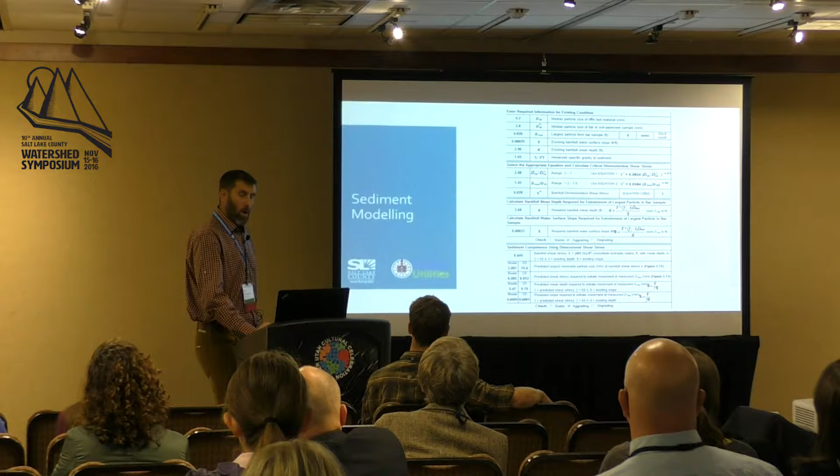And the reason why we do 3 different models, we're looking for convergent lines of evidence, because sediment modeling historically has not really been the most reliable predictor of what's happening with rivers. We do tend to use some of the better models. I use FlowSed, PowerSed. We also use critical shear. We use, I guess, the hydraulic analysis. But we come to a number of different conclusions, and in this case, they all pointed to the same thing.

So another case study of where we've seen something like this happen, Salt Lake County, I'm not going to pick on anybody else's projects, just our own. We have a stretch of stream on Rose Creek at approximately 0.21 miles above the confluence with the Jordan River. And at one point, we had what's called an E-type stream. An E-type stream is a really narrow stream that's got kind of a low width-to-depth ratio. So the width of the stream compared to the depth of the stream at bank full flow gives you a low number. So in this case, the width-to-depth ratio was 3.82.

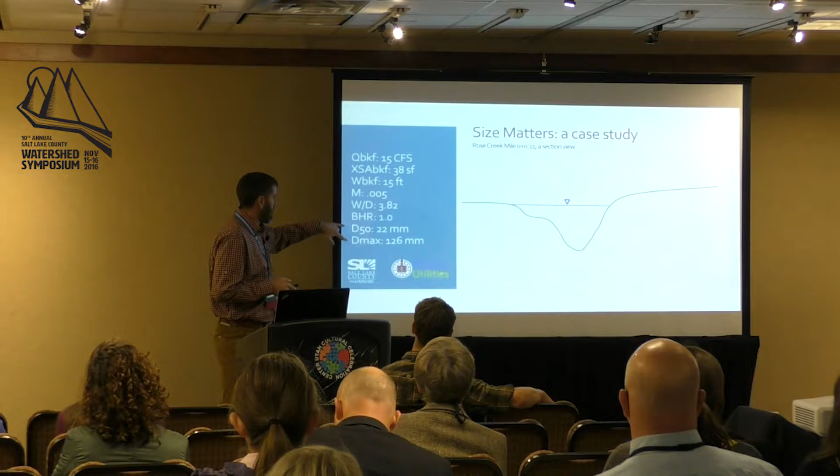The slope of this section was 0.005, so it's a very flat section. Width of bank full was 15 feet, cross-sectional area 38 feet. And then down here, the sediment that was found in this, 22 millimeters, and a maximum sediment particle of 126 millimeters. And then we put in a box culvert so we could put in a gauge there. When we put in the box culvert, we decided we were going to oversize the channel so we'd have plenty of room to move the water through. When you add plenty of room to move the water through, you change the river's ability to function.

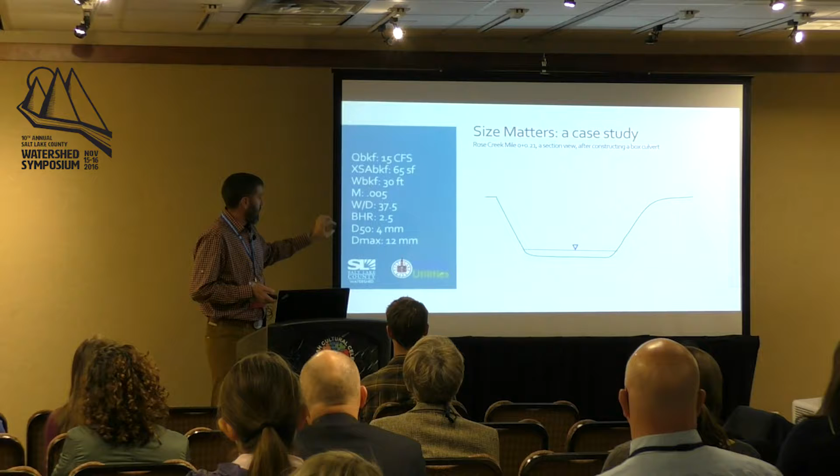This is the new cross-section of that river. And as you see over here, the numbers that can't change didn't, but everything that could change did. So the slope, that didn't change. Width of the bank full, we did change that. Cross-sectional area, we did change that. Width to depth ratio, that ended up changing. And then we incised the channel. And then if we look down here at the sediment, that changed by an order of magnitude. So the river's ability to move sediment through this section, exactly the same location, massively changed. And it's only a 20-foot long section.

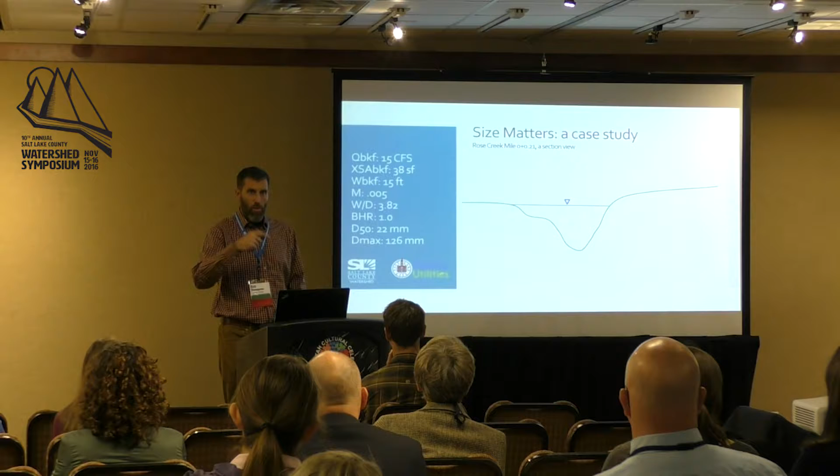And what's really interesting about that, after this channel right here was built, the river rebuilt this one on top of it. So with the first storm, the river deposited 2 feet of sediment, and then almost this exact geometry was rebuilt. So what that tells us is the river knows what it wants, and it's going to tell us every time.

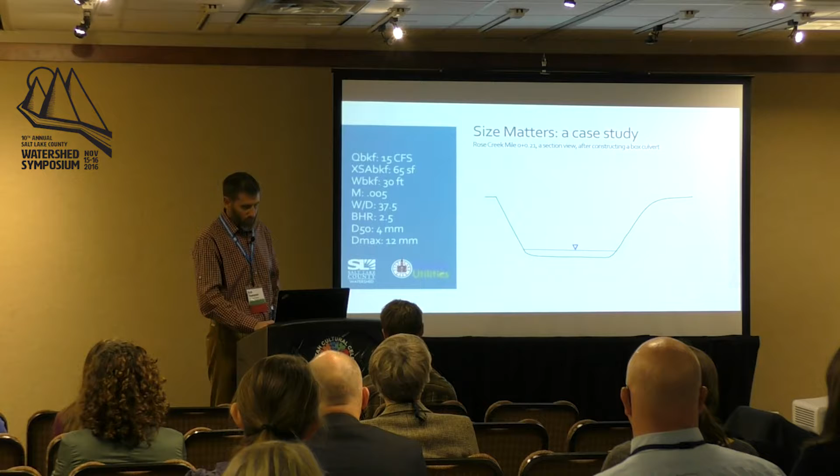So this has been documented by people for a long, long time. This is not a new observation, and if we follow the rules that have been kind of figured out in the past, we could learn a lot.

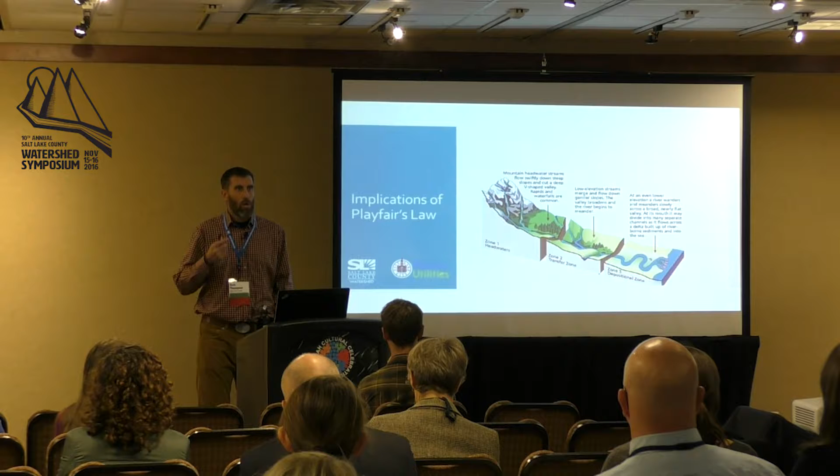So the implications of this, there are certain streams that belong in certain places and other streams that don't belong there. So if we tried to build one of these threshold channels with massive particles down here, it's not the best fit. Try to build a sinuous stream that exists down here, up here, again, not the best fit. So natural channel design, we're trying to put the right stream in the right place.

So what we do, we start by a survey. We go out there, we do the longitudinal profile, fixed cross sections, we monitor it. We use reference reach survey data to compare and to try to determine how far away from our reference reach condition that impaired reach really is. We analyze all the boundary characteristics, all the stuff that we can't change, modeling, conceptual design.

Then we go through the permitting process, come up with a final design, then comes construction, and then monitor and report. And I think a lot of projects, this is seen as kind of a bad thing, but it's an opportunity. You're never going to get good at this kind of work unless you do that. Monitoring and reporting is absolutely critical. So in this project, that's going to be one of the kind of the cornerstones.

Okay. So Bob, the reason we actually, Tom and I like to work with you, it helps that you're good at river math, but we think that they might let us out of the office every once in a while if we work on a project with Bob.

So I wanted to talk for a minute about the opportunity that this area represents. Why 17th South? This particular site, I should say Salt Lake City's section of the Jordan River and the Jordan River Parkway is probably far more constrained by development, especially by residential development, than I think any other segment of the river. And so within Salt Lake City, when we're looking at opportunities for restoration projects, the larger the property, potentially the more restoration we're able to do there.

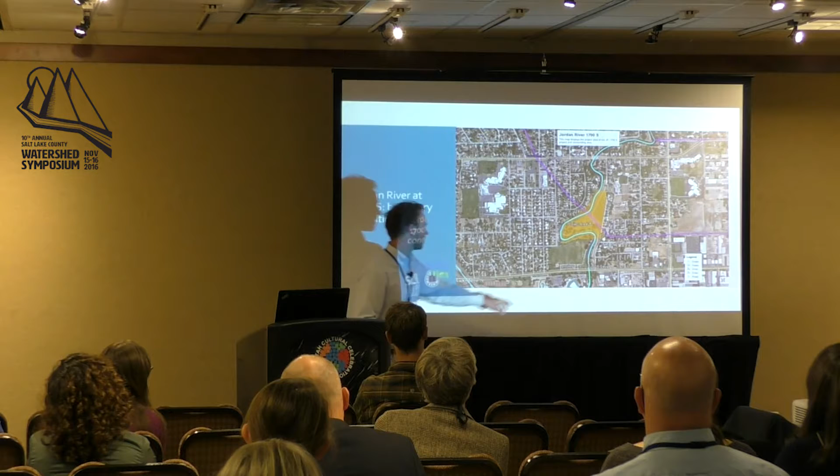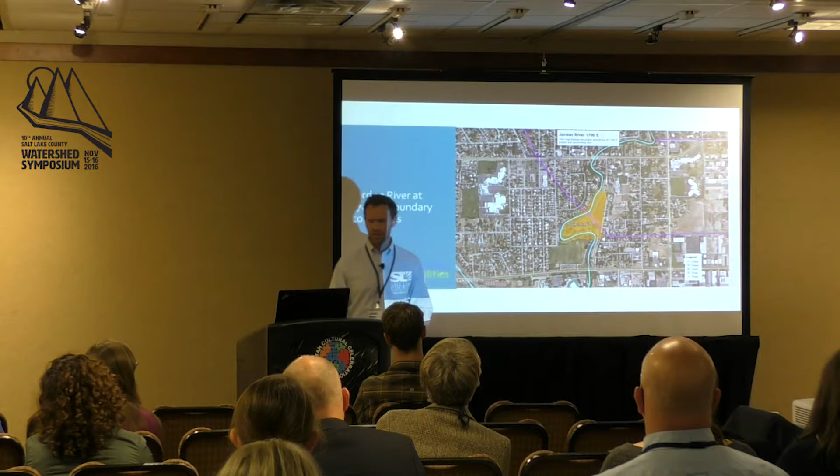So just looking at some boundary conditions and taking kind of a deeper look at what is here. There is a USGS gauge at 17th South, right down here, that we know we can't disturb. There's also a stormwater drain on the site that we can't disturb. That's right up here. And then there's an art installation right near the center of the site that we also can't disturb. We know that flood control needs to remain, they need to still be able to remove sediment from the river. And we know that the channel must still be able to handle up to a 100-year flood event.

And I should also add the channel needs to remain navigable. We're also very interested in this project potentially creating additional wetland habitat or maybe a community fishery. And there are also funding constraints when we're looking at a project like this. Hauling material off-site, and especially hauling it a long distance, quickly becomes cost prohibitive. And so if we can look at a design that allows us to minimize the amount of material hauled off-site, that certainly helps.

It's also, and I think Bob will probably get into this, but some other site constraints include that a short distance upstream of this, the surplus canal takes off and runs towards the Salt Lake. And that canal ends up diverting a lot of the native substrate and also takes the majority of the river's flow, especially during high flow events. So there's a lot of interesting limitations and conditions here. And I think I need to let Bob talk about how those challenges can be addressed and accommodated.

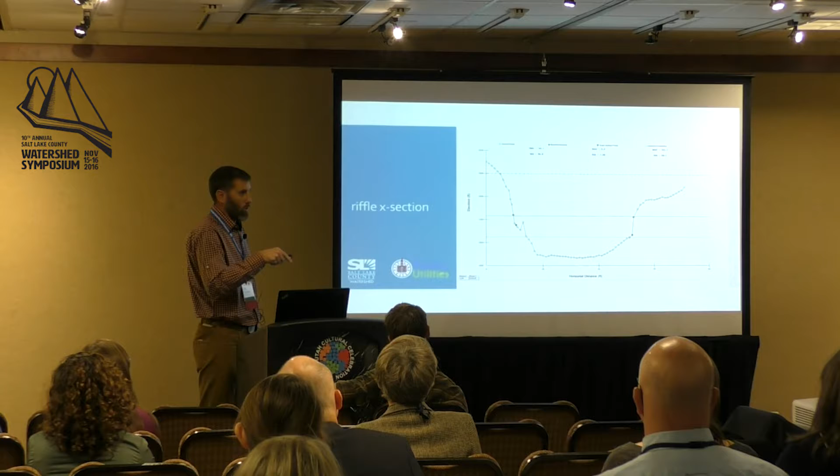Okay. So this is the results of our survey. We have to figure out exactly what we have. So this first cross section that you're looking at, this is a riffle cross section. And one thing I want to point out on this riffle cross section, this line right here does not represent water surface, nor does this one. This line right here represents a bank full flow, or roughly a 1.2 year return interval flow. This one right here represents the top of the inner berm or the low flow channel. So water surface at the time we surveyed was actually located here.

This line up here represents your flood prone area, or in this case that represented almost a 500-year event. So to get water outside of the channel, you need close to a 500-year event. So what a lot of people call a floodplain, this surface that's up beyond here, it's not a floodplain. That's a terrace. So what we need to build right here obviously needs to incorporate flooding. So this line right here is more akin to the elevation.

The other thing I wanted to point out, this channel right here would represent a trapezoid if not for this triangle right here. When we were surveying that, that was almost hip deep sludge. I mean, it was really fine in its gradation. And if you've ever been in a riffle before and you've got silt accumulating there, you've got big problems. This river is not functioning.

This is a pool. So this one had a deeper outside bend than it did on the inside bend, and that more or less is what you ought to see on a pool, but the lines represent all the same stuff. So this one right here represents your inner berm, or the top of your low flow channel surface. This is your bank full surface, and this right here is your flood prone area, again representing almost a 500-year event. So even in this section right here, and this one has actually had restoration done on it, so this outside bend, there's riprap there, there have been plantings installed there, but we still have this surface right here that is significantly above our bank full surface, so it does not function as a floodplain.

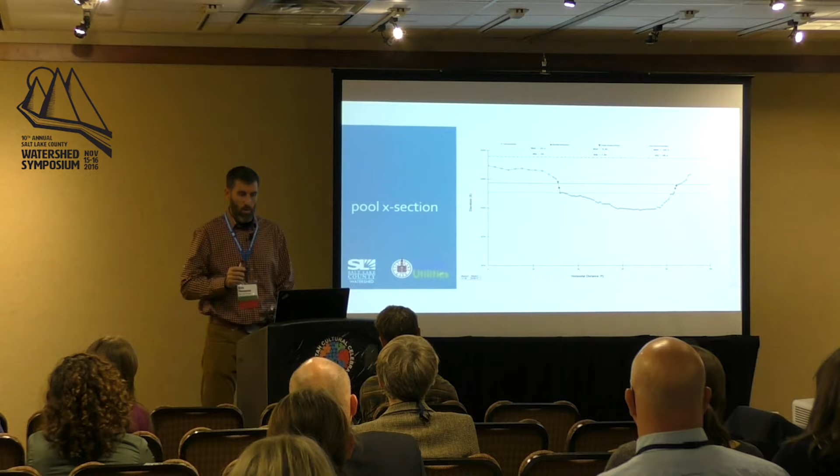So our bank full flow, they're pretty close, not significantly different. Our 100-year flow, there's a little bit of a difference there. In the Jordan River, because, as Lewis said, most of the flow is taken down the surplus canal, our 100-year flow in this design scenario is only 500 CFS. So it's much smaller than it would normally be without that surplus canal diversion. Our width to depth ratio is a little over twice of what it should be. Our channel is highly incised. Instead of having a bank full surface that is the floodplain, our bank full surface is almost half the floodplain. So that floodplain is elevated way too high.

Radius of curvature isn't too bad. Our linear wavelength is way too long, and our sinuosity, it doesn't even compare. Oh, I actually have these switched. My apologies. This is supposed to be 1.0, not supposed to be 1.6. So, oh, no, I have those right. Sinuosity right there is 1.0. So basically we have no functional sinuosity in the Jordan River channel. Even though it's on a bend, there really isn't a functional sinuosity there.

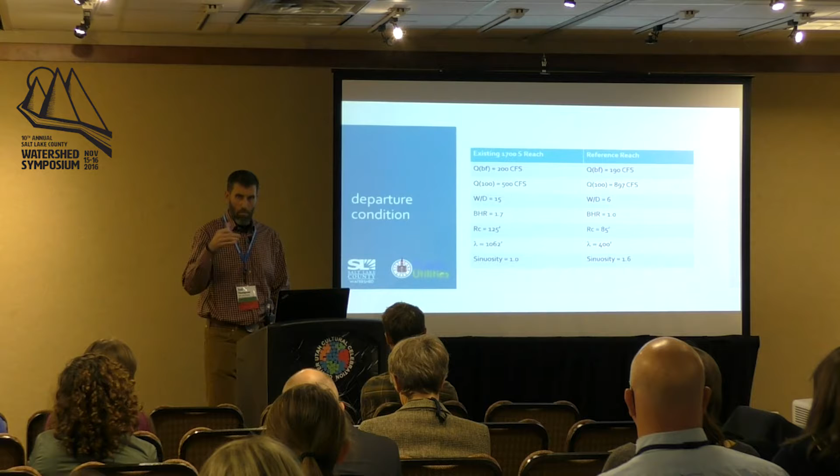So the next thing we had to do is try to come up with a channel that could actually solve the problems that we just described. So what we're going to build is a channel that is much narrower across the top and the bottom, has much steeper sides, and has a much wider floodplain.

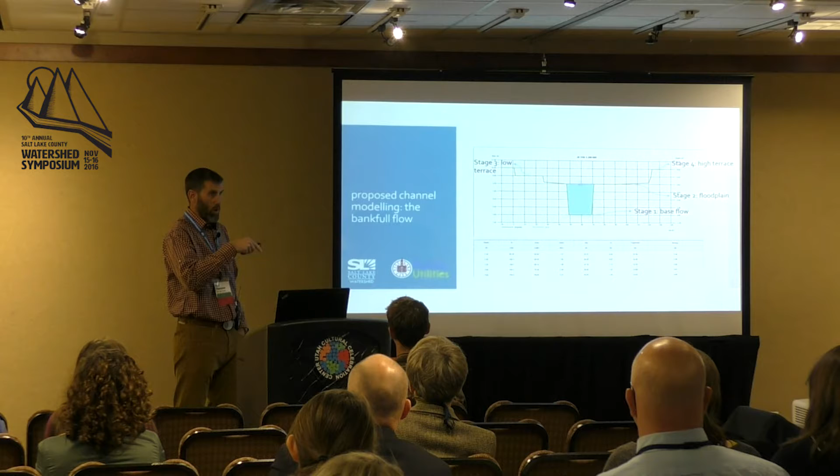And so the challenge here was making sure that our bankfull stage really was the floodplain, meaning the 1.2-year return interval flow would escape that low flow channel at that point, which was 200 CFS. So that worked out. We had to keep the 100-year event or 500 CFS contained in this high terrace. Again, it all worked out. Took a little bit of playing, but we were able to do it.

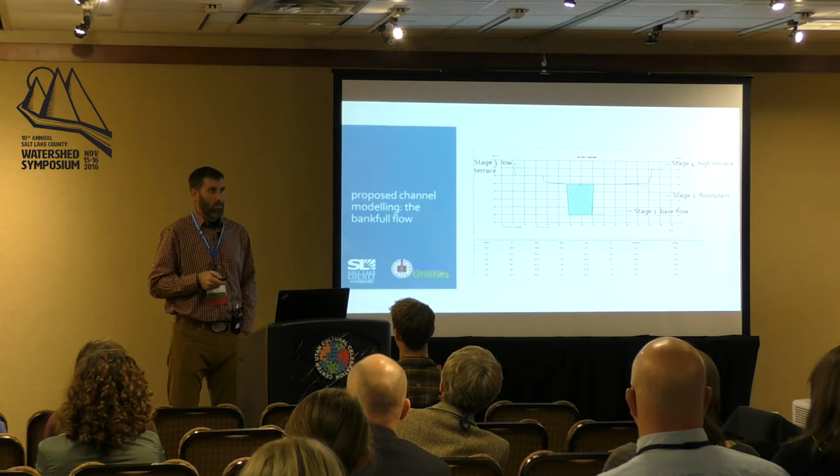I would normally build an alluvial channel at this point because you would have recruitment of gravels, so you could resupply with every flooding event, but here we don't have that opportunity. So what we have to do is make sure that our D50 particle size is going to be 35 millimeters. And that should make sure that it stays in place according to everything we put together with channel hydraulics.

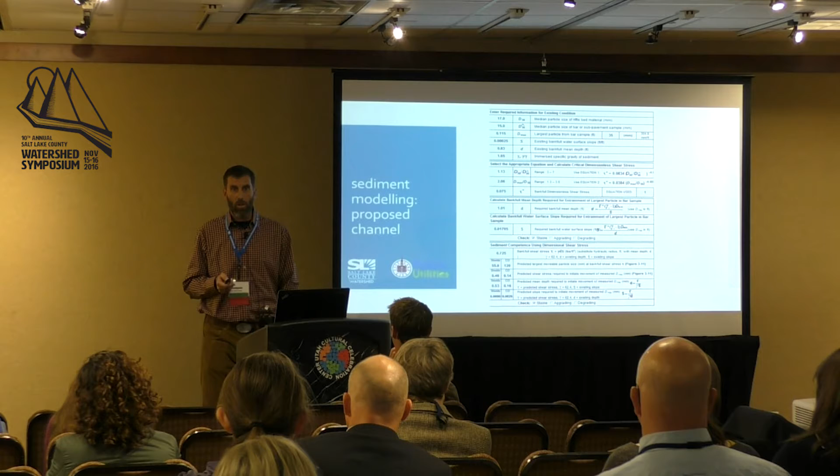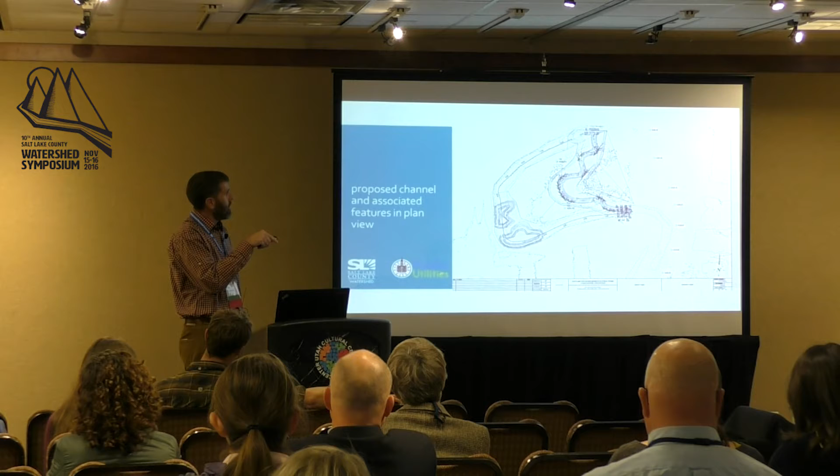So what we've done is we've kind of put a cutoff structure right here. We're going to route the channel around here. The peace tree structure is right here, so we're kind of using that as a focal point of the bend. We're going to do a compound pool structure here and then follow the radius of curvature that we got from our reference reach through the rest of the bend. We're not going to use any riprap to armor these.

The structures that we've designed on the outside of the bends are called toe wood structures. We've tried these on other parts of the Jordan River and they've worked extremely well. The best part about these, we're actually finishing a project right now about 51st South, and we got approximately 400 trees this year. Every single one of them was free. So it's really nice when you can do a project where your revetment material comes at no cost.

The other thing we're trying to add into this design, we really wanted to have some community fisheries / wetland treatment plant facilities. So we're actually going to divert some of the water at this diversion structure and we're going to put that into these ponds. Now what we've drawn up right here are 2 ponds that equal 1 acre in size. Now I know there's kind of a rule of thumb where you should always have a pond at 1 acre and you should always have it at least 16 feet deep, and there's a lot of rules that people tend to follow.

But these ponds, if we follow this design, they're going to have about 4 CFS coming into them at low water. So we're going to have a tremendous amount of recharge coming into these. They're not going to stagnate.

So the last question we have to answer is, ponds tend to fill up with sediment, and especially in this section of the Jordan River, we are overloaded with silt. So if you put a structure in that we're calling a sediment sluice, we can actually alleviate that. It will require some maintenance in the form of somebody out there actually turning the sluice, or it's a screw gate that you have to shut during low flows and open up during high flows to flush sediment through.

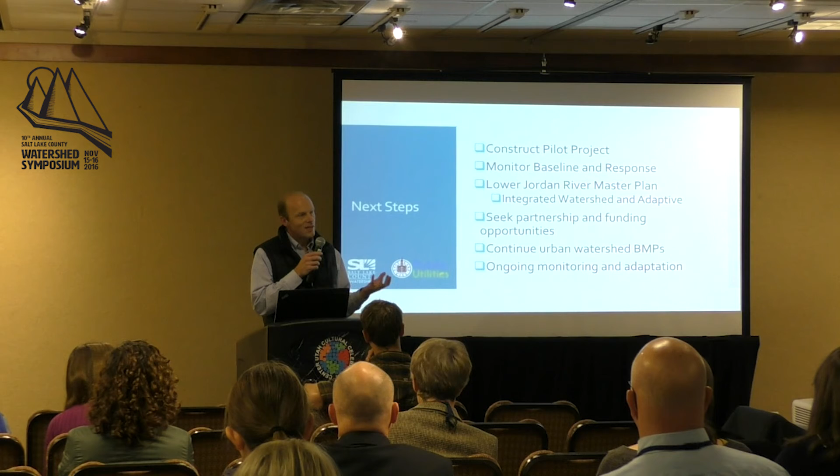Back to the water quality, I don't know if I expressed this well enough. As that sediment deposits and you have methane generation and you have high flows come and then stir that up, we believe that's at least one of the mechanisms causing the dissolved oxygen sink. So by using the channel section that Bob has described, now we can force the sediment to not have that DO event, right? But in the meantime, we end up with a habitat. We end up with a natural stream function. We end up with really a natural system engineered back in our local community.

So, got a little time, Sam, for questions.

Next steps, I think we've talked about this. This becomes a pilot project for us. So there's the permitting, the funding, and then we see it being part of a master plan, really in partnership, not just with our entities, but with the state and other stakeholders. And then there's a lot of opportunity for the whole Lower Jordan River.

Can I take one question? Ty.

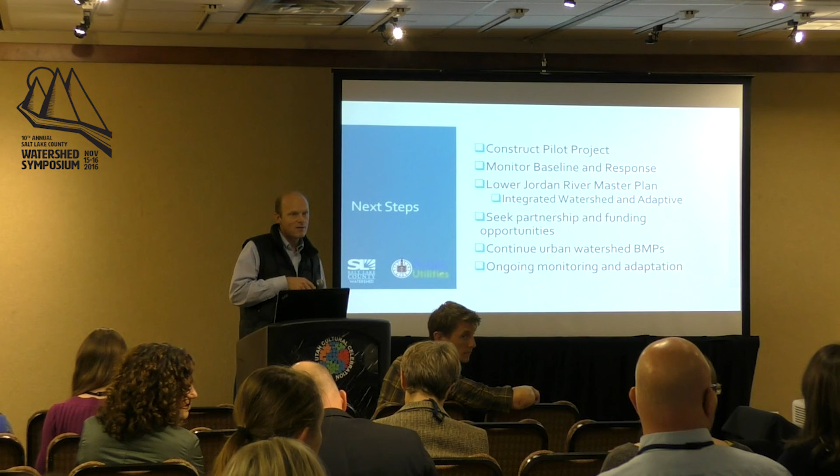The question is, will our 1700 South storm drain, we have a pump station. Salt Lake City has a number of pump stations and outfalls. I bring up this slide here. The project that Bob's talking about is doing the geometry here. I bring this one up because we see another solution that we haven't illustrated here is when we have an outfall, rather than just being a treatment wetlands or whatnot, there's another function that happens.

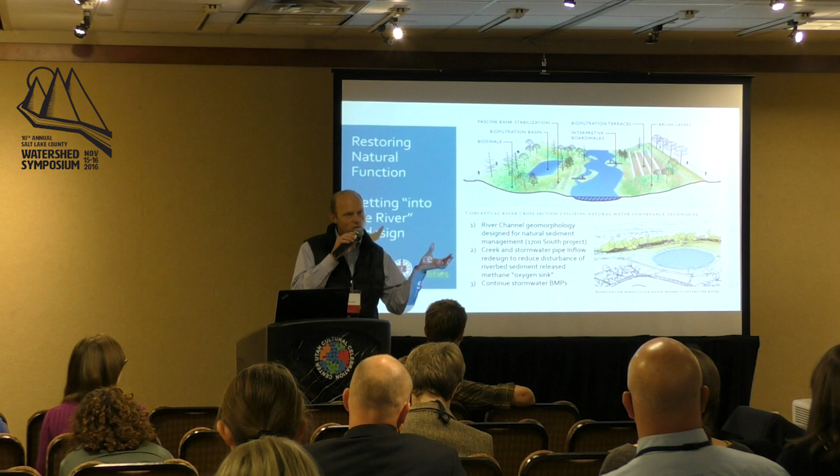If we have a pipe that goes in, it's going to stir everything up. If we can create a wetland where now you have 100 feet of it gradually coming in and not stirring up that river or lake, we see that being another engineered natural stream function. So to answer your question, we see, not in this project, but other projects, taking our outfalls and doing them in a better way.